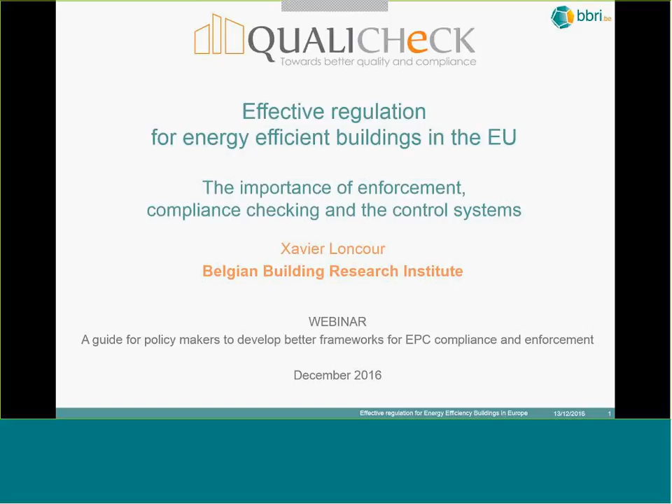Looking at the context of energy efficiency in buildings, we see that we are putting the bar higher and higher, with increasing ambition levels. We want to build nearly zero energy buildings, and we need to know how to build effective regulation to succeed in having more efficient buildings running on energy efficiency, and not fail when we want to reach this objective.

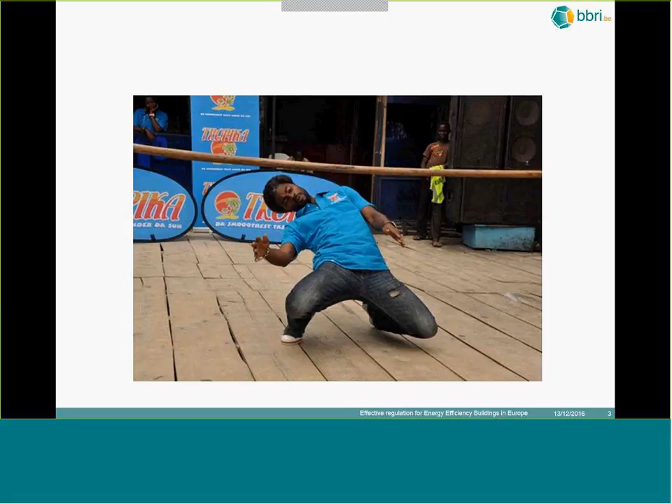So the question is not only to have a regulation, but also to have a regulation that is respected in practice. And on this issue, we have specific experience in Belgium.

Because we introduced the first insulation regulation on buildings in Flanders, a region of Belgium, in 1992-1993. On this slide, what you see is the average insulation level, where a requirement was set, for 200 buildings. Every point is a building, according to the construction date.

In 1992-1993, we introduced a requirement on this, and you see the black bar, which is the requirement. Actually, every point, every building inside the area, is not complying with the requirement.

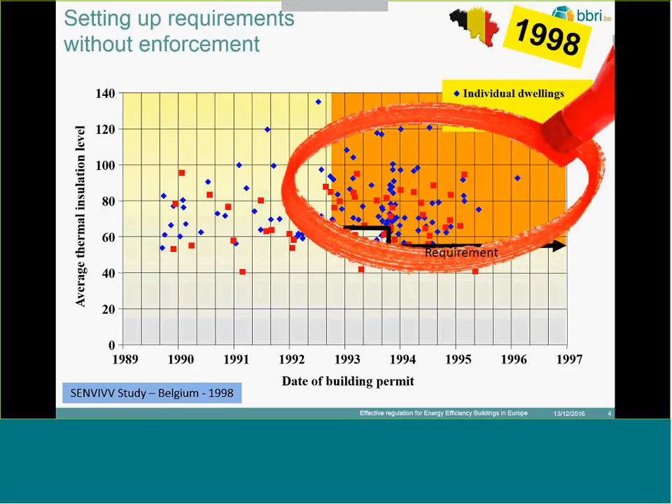It was a learning for us that it's not enough to put in a requirement, but you really need a compliance framework. So this was the first learning of this presentation: without compliance checking, you will have nearly zero impact, and for a lot of people it was really a big disappointment.

Now, the next step in the story is that in 2006, again in Flanders, we introduced the energy performance regulation, this time with compliance checking. And here you see the result of this new regulation.

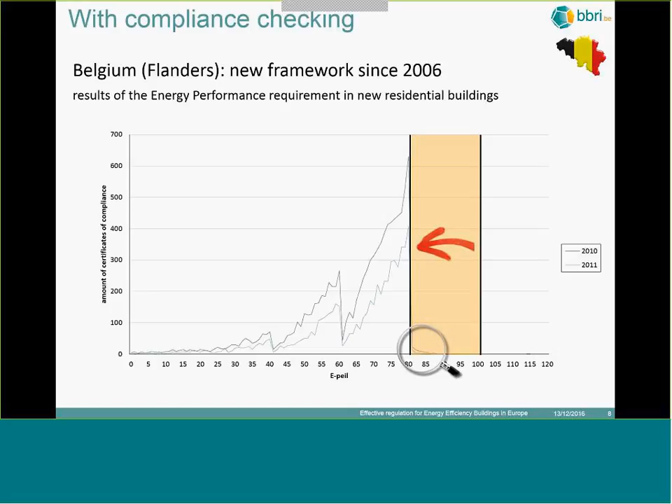What is interesting is that in 2010, there was a strengthening of the requirement from E100 to E80, and what we see from the very first year is that almost every building is complying. So it's really a success story in this context, and we will explain what the success factors were for that.

The first success factor is that with compliance checking, you can expect the full impact of your regulation. It's not sufficient on its own, but it's really necessary.

The question is, what are the success factors to succeed in doing effective regulations? To answer that question, we will use information from the EPBD Concerted Action, which is an action regrouping every member state in Europe, with discussions between member states on how to implement the Energy Performance of Buildings Directive.

So most of the examples I will show today are coming from this book. And I will take 3 examples from 3 EPBD requirements.

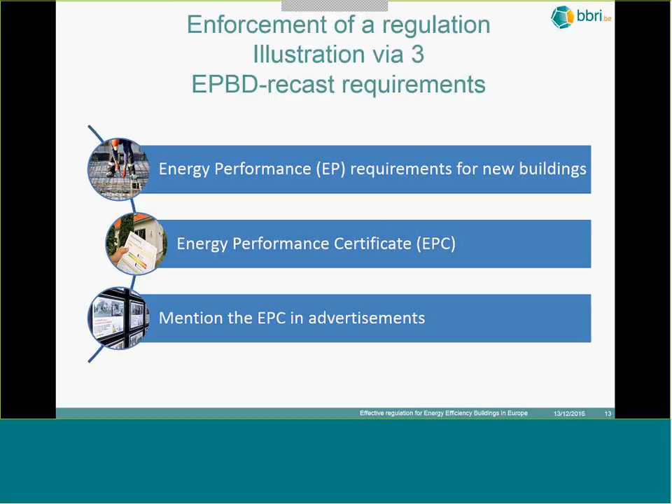The first one is on energy performance requirements for new buildings. You also have requirements regarding the energy performance certificate, the EPC, in the directive, and a requirement regarding the mention of the EPC in advertisements when a building is sold or rented.

The second success factor is that you need to know how to monitor your compliance rate. To illustrate that, I'll take an example of the requirement for new construction.

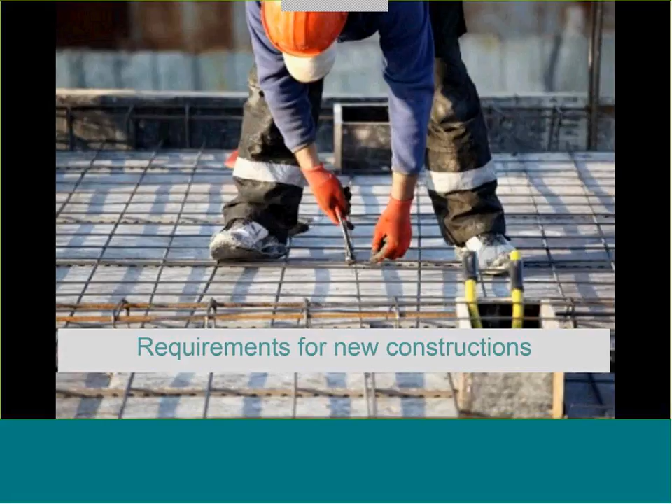In the Concerted Action, we discussed whether member states knew the compliance rate regarding the new building energy performance requirement. In 2014, we found that only 52% of member states actually knew their compliance rate. It means that about half of the member states at that moment didn't know the compliance rate regarding this requirement.

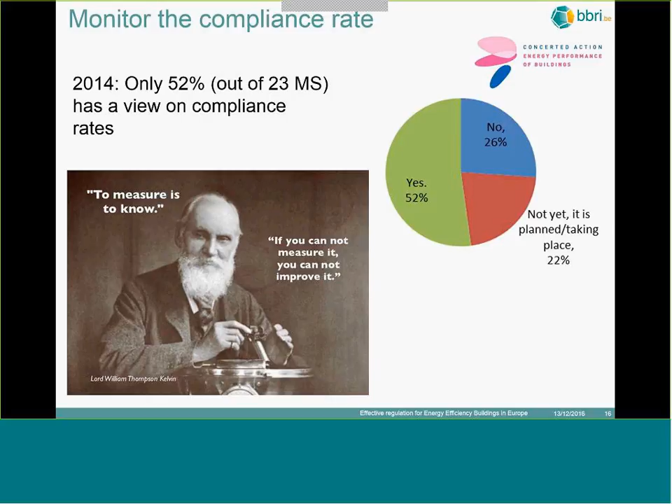As Lord Kelvin said, to measure is to know. If you cannot measure it, you cannot improve it, and that's valid for regulation too. If you don't know the compliance rate, you cannot improve your regulation. So it's really necessary to monitor the compliance rate.

The success key is to define a clear legal framework and actor responsibilities. Looking at the building process, you have several actors involved: the inspector, who makes the control and in many countries is a civil servant; the owner of the building; an architect; and several building contractors. There's also a fifth person involved, the rapporteur, who has to report on the energy performance of the building.

If you look at the different responsibilities and the legal framework, in general what we find in Europe is that it's the owner who is responsible for fulfilling the requirement. In some states, provisions give responsibility to the developer or professional advisor, for instance the architect. The responsibility of the rapporteur is to make a correct certificate of compliance.

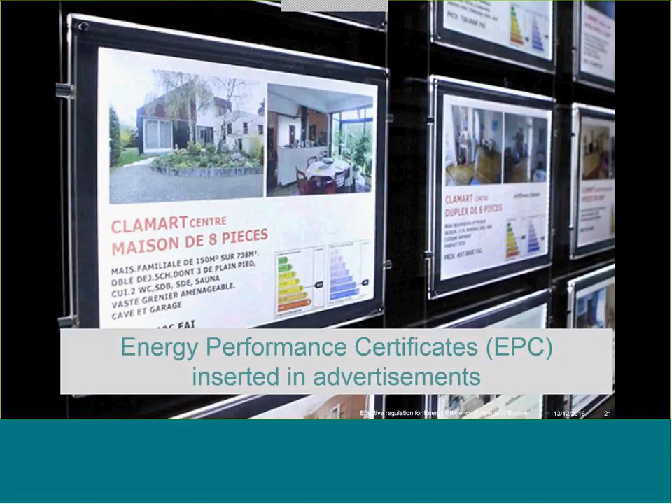Just looking at the responsibilities, if we look at the requirement to have an energy performance certificate inserted in advertisements, we had that discussion in Concerted Action to see who is responsible to comply with this requirement. In Europe, in a set of countries it's the building owner who is responsible; that can be the real estate agent, a representative of the building owner, a web-based company, or a notary. But what's interesting is that in a set of member states, nobody is responsible to comply with this requirement. In this case it's impossible to enforce your regulation and have a high compliance rate. So it's really important to have clear responsibilities.

In Belgium, we changed the way we enforce the regulation. The enforcement strategy in Flanders is based on three pillars: the first is the carrot, then the tam-tam, and then the stick. The stick refers to the sanctioning system, which is the fifth success key to having an effective regulation. You really need effective sanctions adapted to the local context.

Again, looking at the situation in Europe, we see that some member states started enforcement of the requirement for new buildings quite recently—some started enforcing it in 2014. At that moment, some member states had not even started enforcement yet.

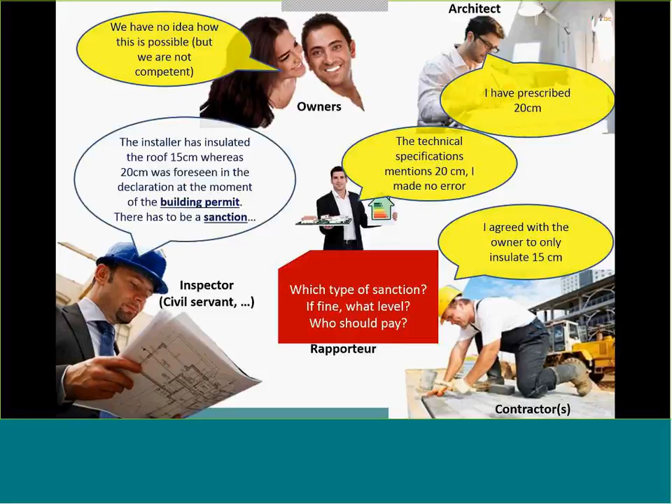So it's a very difficult situation, and the question is which type of sanction can you give. First you go for a fine, but then the question is at what level and who should pay. A specific situation in Belgium, where we changed our mind on this aspect, is who should apply the sanction. In Belgium, it's not evident that an energy problem would receive high priority from a judge. So now the sanction, in this case fines, are directly laid down by the administration, which makes for an effective sanctioning system.

So in Belgium, we have a fine system. How is it working? The amount of the fines are directly defined by the law. For instance, for transmission losses, if you're not fulfilling the requirements, you could have 60 euro per watt per Kelvin. So for instance, if you take a window of 5 square meters, at a difference of 0.5 watt per square meter per Kelvin, the fine would be 150 euro.

One specific element in the Belgian situation is that the fine is directly calculated and presented in the official energy performance software. So if you are not complying with a requirement, you directly know what will be the consequence for you and what the fine will be.

For instance, in Flanders in 2013, fines were given to about 10% of new Flemish buildings, mainly regarding non-compliance with ventilation requirements.

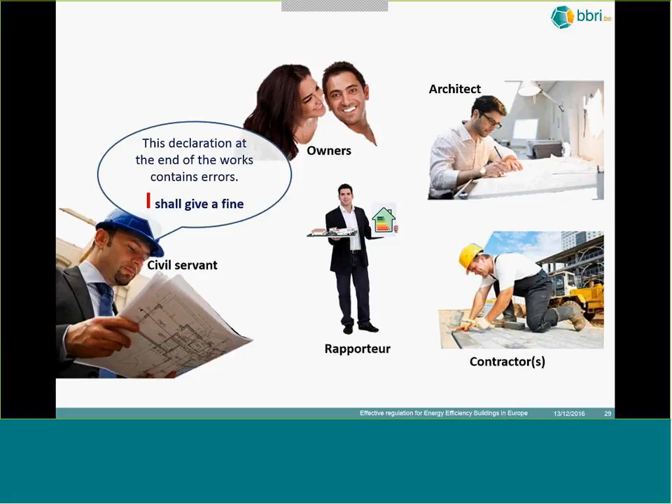Now, let's come back to our example of this roof. For the civil servant, it's clear the declaration contains errors, so he has to give a fine.

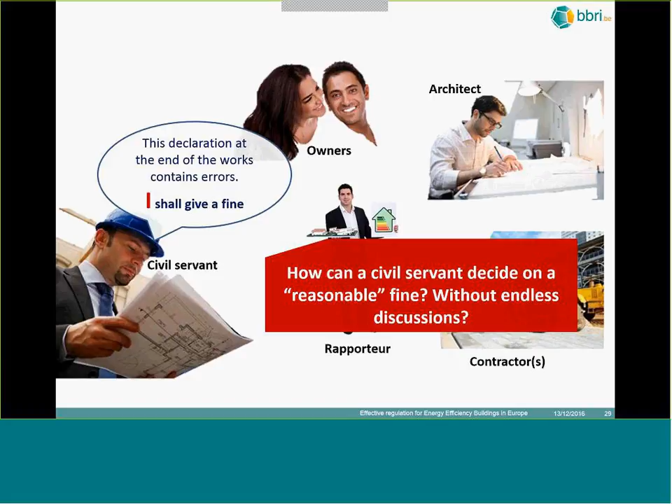Now, how can we decide on a reasonable fine without endless discussion? In the Belgian example, the level of the fine is directly integrated into the law, so the fine is calculated, the amount you see there, and who should pay that. Otherwise, you could start the discussion that nobody made an error, and try to distribute the fine according to responsibility, which can be a very difficult duty.

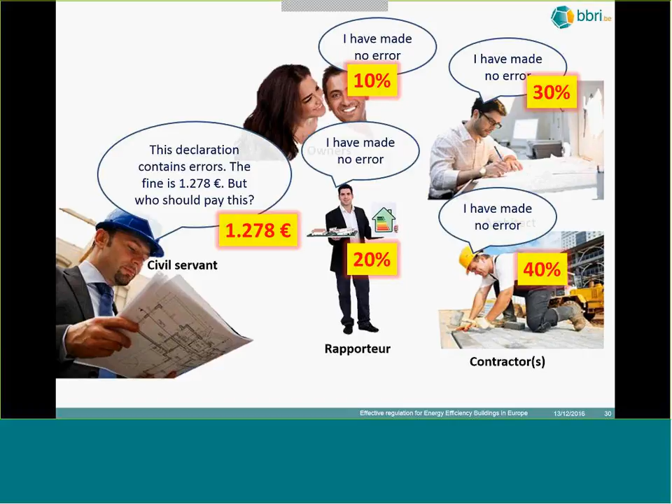So we chose a different solution in Flanders. For instance, we had intensive stakeholder consultation at the beginning of the year 2000, and reached the consensus that the inspector should not have to investigate which party is responsible.

So in this case, if the declaration is wrong, it's the rapporteur who pays the fine. Of course, maybe the mistake is not coming from him, and he should be able to transfer the fine to the person who made the error. If he has a relevant document, invoice, technical prescription, or visit report, he should have a strong case to recover the costs from those who made the fault.

Now, in this case, the amount is clear, and the fine will be paid by the rapporteur if there is an error in the declaration at the end of the work.

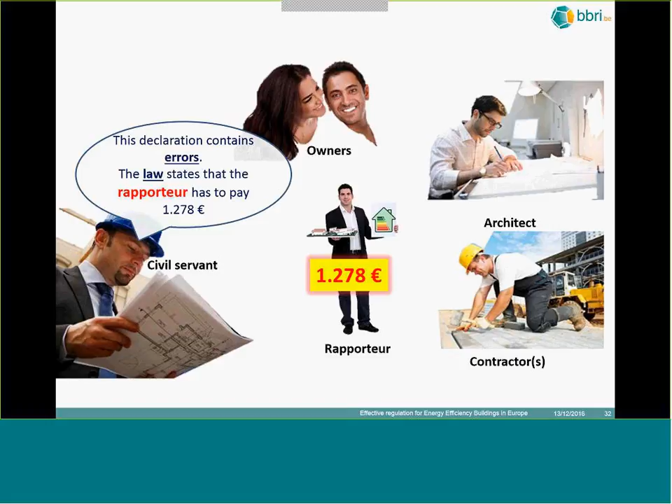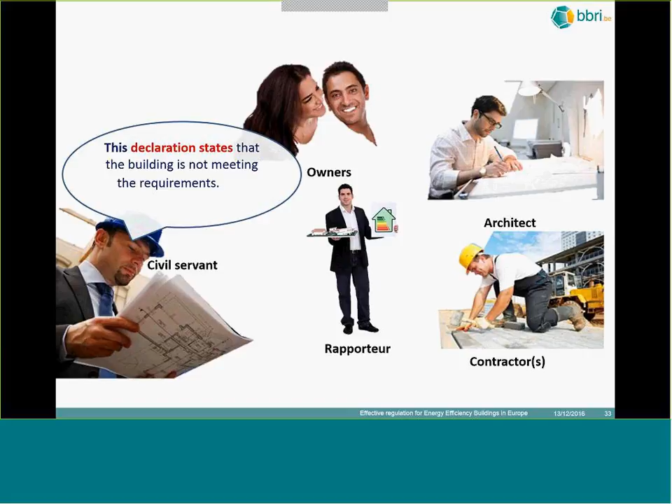Now you can have a different situation. The declaration in this case is correct, but you see that the building is not meeting the requirement, which is different. In this case, the rapporteur is not responsible for that, and it's the owner that has to pay the amount. Of course, for him, it can be a disappointment.

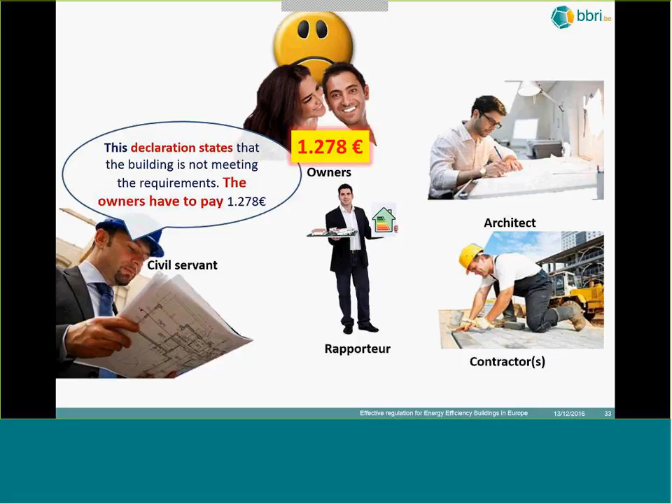So, it's possible to give a sanction to the owner, because private owners are considered non-competent as builders. So how is it possible that they have to pay the fine?

Actually, in the legislation in Belgium, there is a specific provision that says the architect must inform the owner if certain decisions might lead to non-conformity with the legal requirement. So it's not that he was not aware of the situation. He was aware, he decided to continue with the construction process, and at the end he received the sanction.

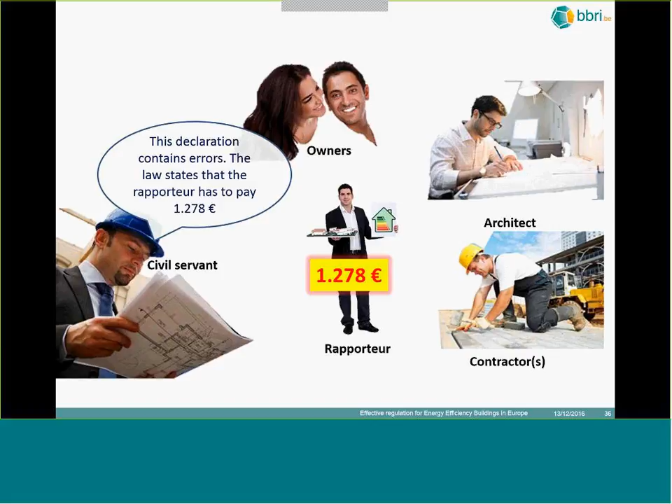Success factor is about compliant and easily accessible input data. Back with our example, there is a sanction given to the rapporteur, and you could start the discussion: okay, there is a fine, but you didn't take the correct input data into account. And the discussion is starting.

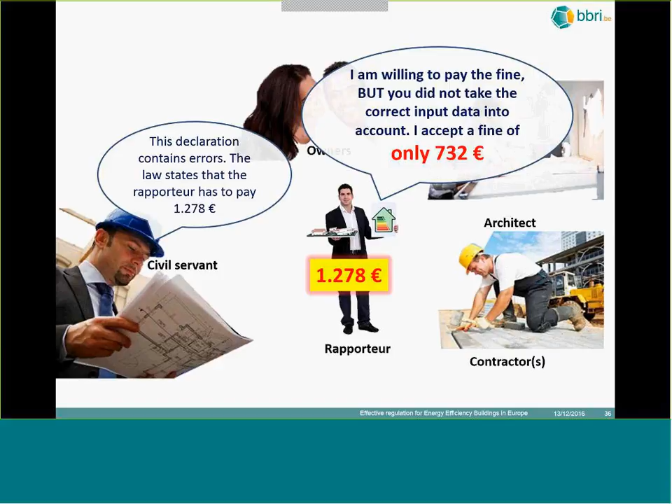This discussion regarding input data has already been discussed in the QUALICHeCK project, also during other webinars, so I will not enter into more detail on that, but if you are interested, there is a lot of information in the QUALICHeCK project regarding this issue.

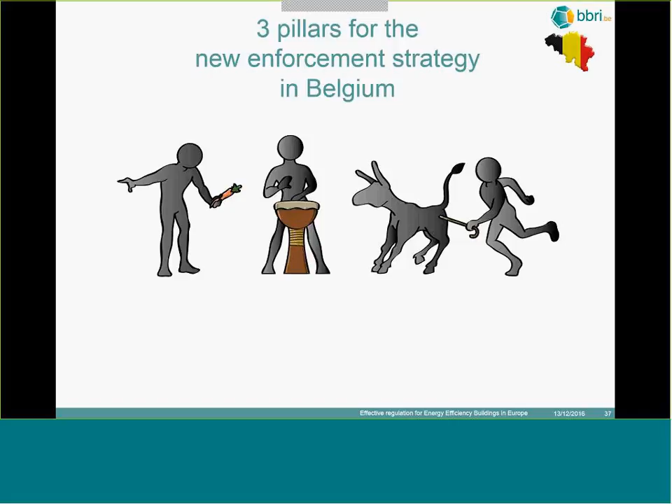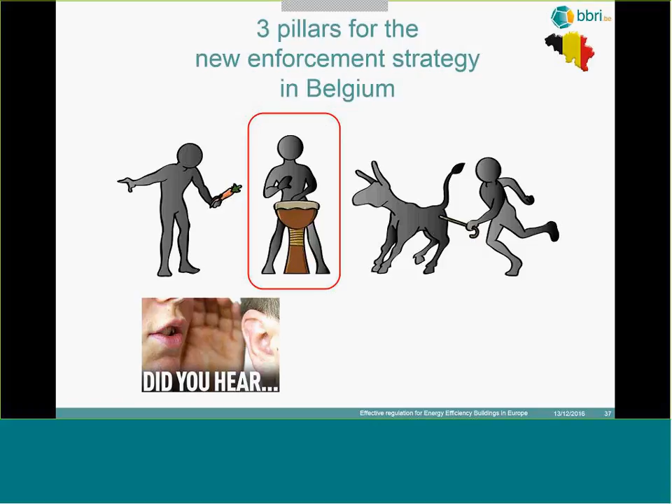If we continue with the 3 pillars for the enforcement strategy in Belgium, we spoke about the stick, then there is the tam-tam. You have to show the different professionals that an enforcement system is in place with sanctioning, and very rapidly everybody will be aware of that. It's very effective within the profession, for instance for real estate agents or building contractors.

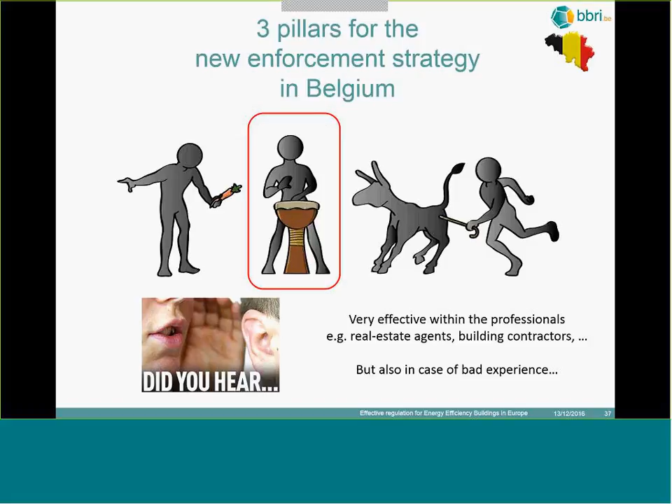But you have to be aware that it works in both directions, and if you don't have any sanctioning system or effective compliance system, they will also know. So you have to pay attention to that. The tam-tam can be efficient and effective, but in both directions. And the third element is about the carrot.

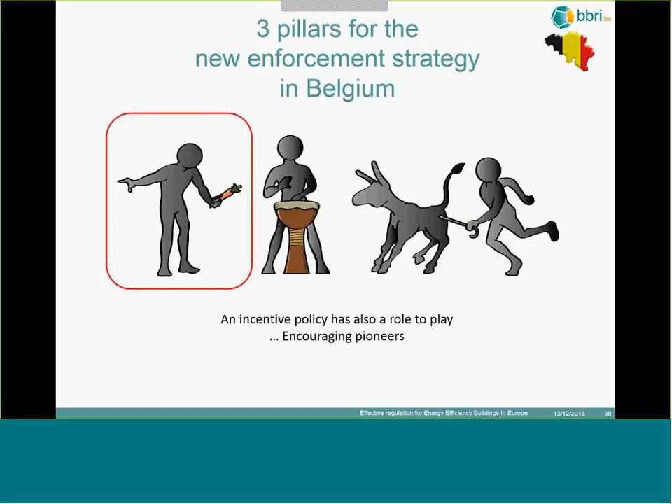An incentive policy also has a role to play by encouraging pioneers, and several member states in Europe have this tradition of incentive policy. It's also, for instance, the case in France.

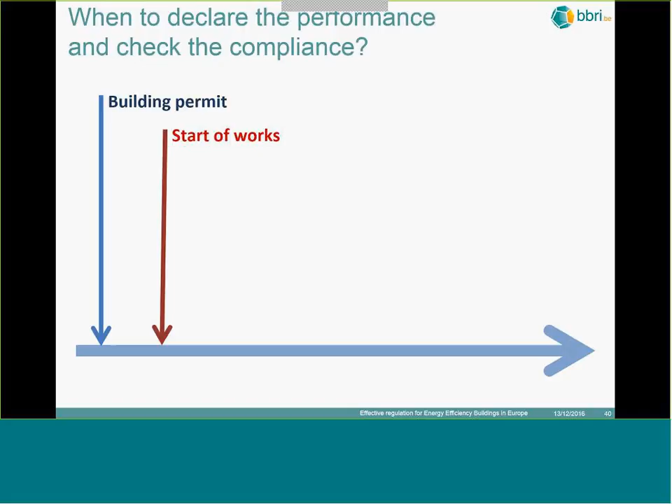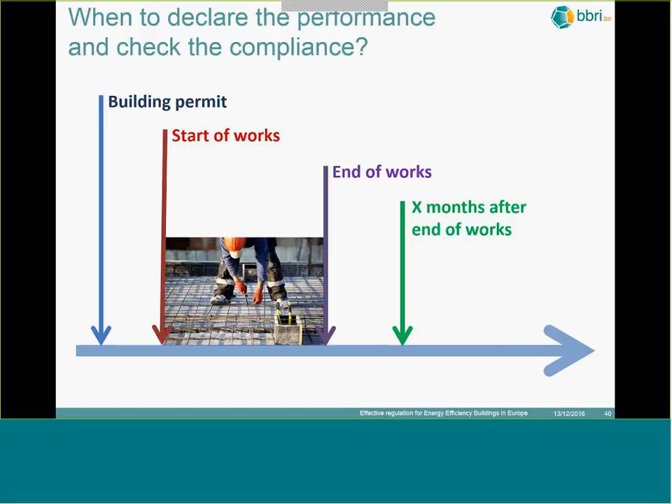The fifth element regarding effective regulation is to choose the appropriate moment to check compliance. If you look at the construction process, you could declare the performance and check compliance at different moments: at the building permit stage, which is still occurring in a lot of member states; at the start of the works; during the construction process itself; at the end of the work; or a few months after the end of the works.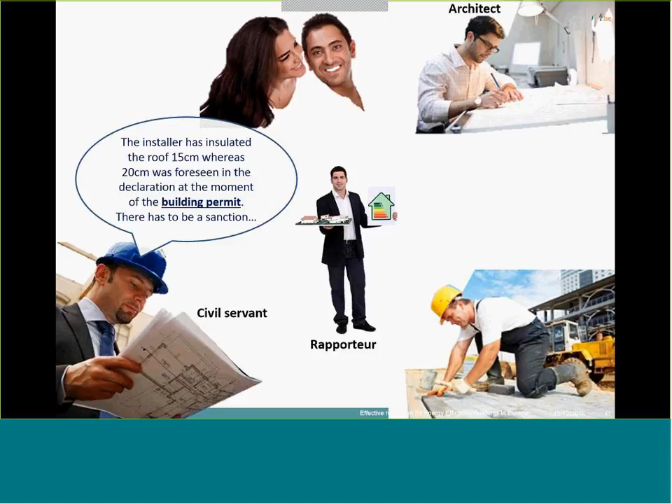We got an example of this with a roof. The installer insulated the roof with 15 centimeters, whereas 20 centimeters was foreseen in the declaration at the moment of the building permit, so there has to be a sanction.

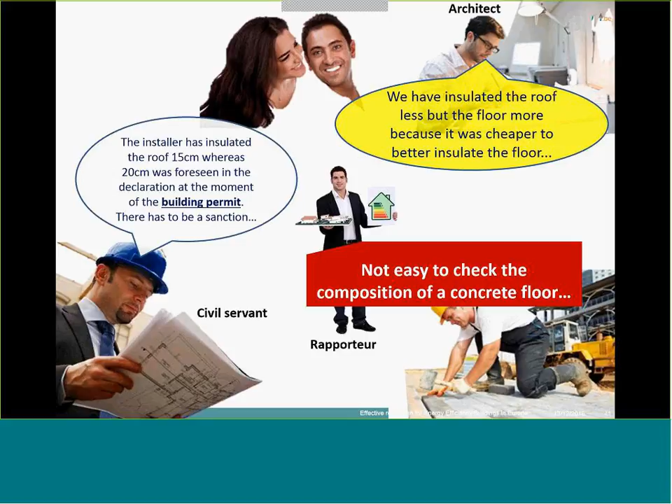A possible discussion: could the architect say we insulated the roof less, but insulated the floor more instead, because it was cheaper to insulate the floor, and at the end we have the same performance? If this kind of discussion starts, it's actually not easy at all to check the composition of a concrete floor when the building is finished.

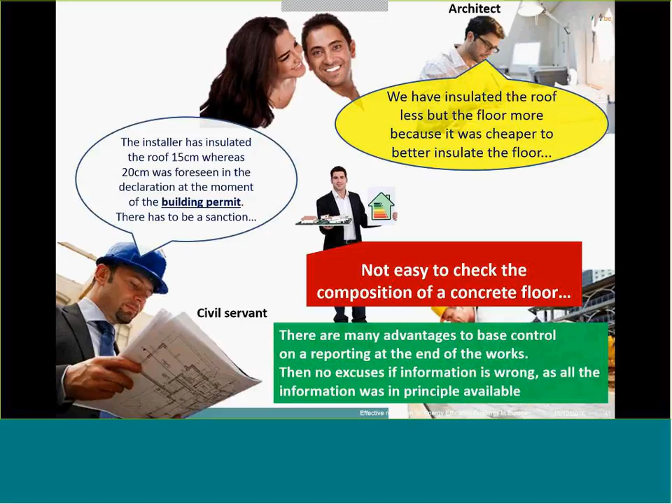We see that there are many advantages to basing the control on reporting at the end of the works, because then you have no excuses if information is wrong, as all information was in principle available.

So in Belgium we have changed our approach, and now we don't check compliance anymore at the building permit stage, but we do it a few months after the end of the works, when you introduce the final declaration. This situation has other advantages too.

When the building is built, you also have the chance to take into account the real performance of the building, for instance regarding the air tightness measured with a blower door test, or the airflow rates of ventilation systems measured on mechanical ventilation systems. So that's another advantage of doing the check at the end of the works.

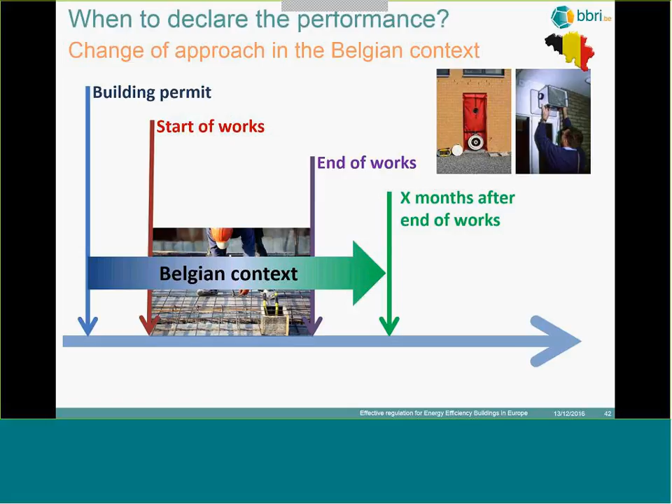If we look at the situation in Europe regarding this compliance check, what we see is that the standard practice is still to check compliance at the building permit stage, or before the works start. You see that almost 80% of member states do the check at the design stage.

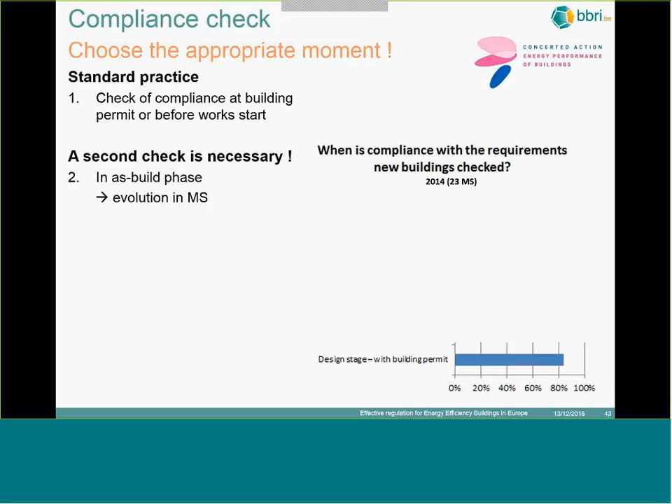But actually a second check is necessary at the as-built phase, and we see an evolution among member states. Before 2010, about 42% of member states made this check at the end of the construction work, and we see that 4 years after, in 2014, the number of member states doing so has strongly increased.

What can this check consist of? Some member states in Europe, like Sweden, check the real consumption of the building, something you can only do once the building is constructed, of course.

You could have a permit to use the building based on the as-built situation, or you could simply check when construction is finalized, what we call the as-built situation. So it's also a trend we see in Europe to do that at the as-built stage.

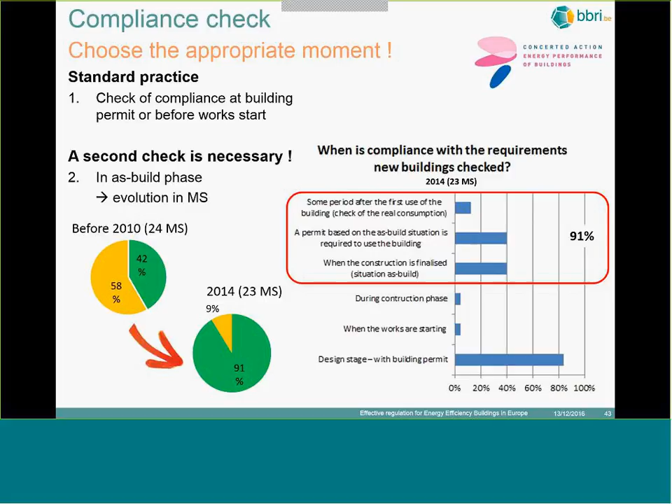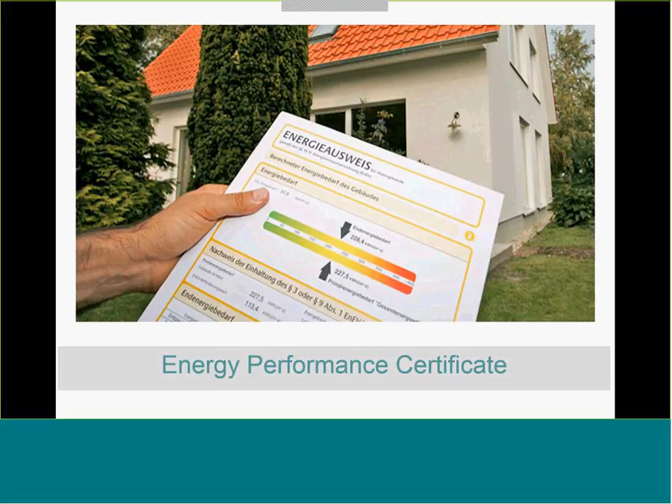The success factor is to design and build an efficient control system. To illustrate this, I take the example of the energy performance certificate, which you need in case of construction and for existing buildings. You will have this EPC in case of a new building, and you will also have an EPC in case of an existing building to sell or to rent.

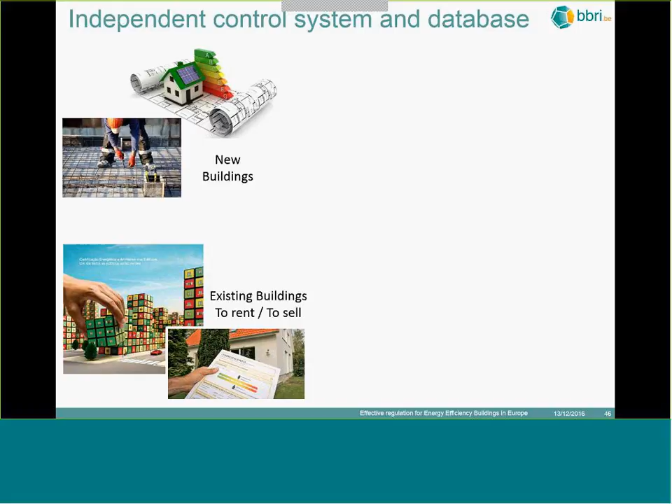The standard practice now in Europe is that these EPCs are centralized in a database. A database is not a requirement from the Energy Performance of Buildings Directive, but we see that a lot of member states now have this database.

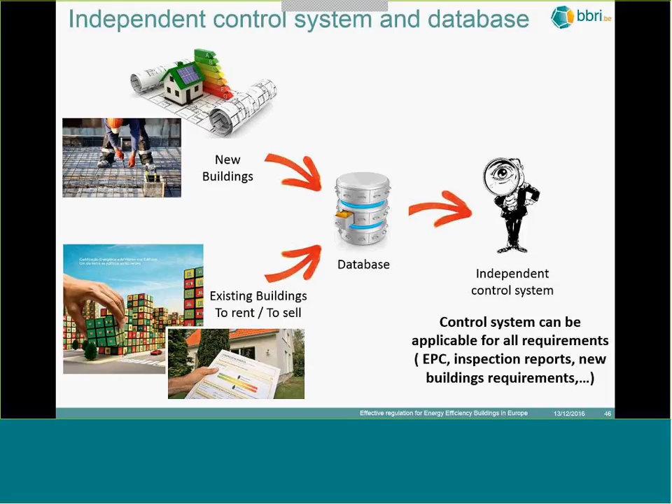This database is, of course, a perfect tool to operate your independent control system. You may have one control system for all requirements of the EPBD, covering the EPC as in this example, but also inspection reports and new building requirements, for instance.

In our EPC database survey in 2012, we saw that 18 member states had a central EPC database. This element is really seen by many member states as a crucial element of their system, because there you have a lot of information where you can do your controls.

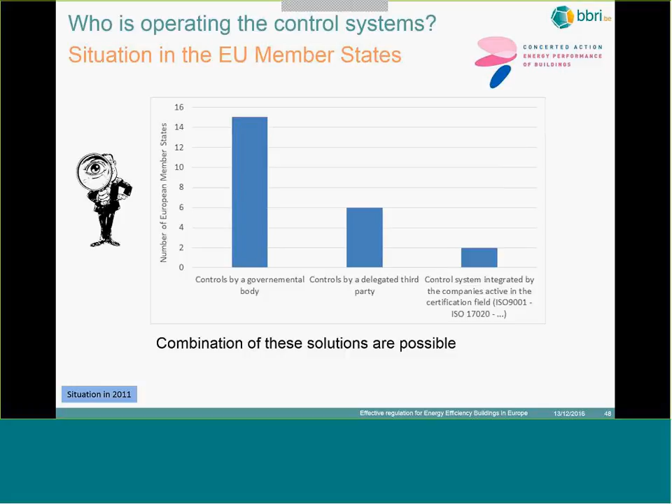The control system: in most member states, it's operated by a governmental body, for instance an energy agency. Control can be delegated to a third party, or the control system can be integrated by companies active in the certification field. Combinations of these solutions are also possible.

So the purpose of the control system, if we take the example of the EPC, is that you want to know if your EPC is a good one or a bad one. You could compare an EPC with a ball, a gray ball, and you want to look at that ball, but you don't know if it's a good one or a bad one. If it's a good EPC, it will be a green ball. If it's a bad EPC, it will be a red ball and will be rejected.

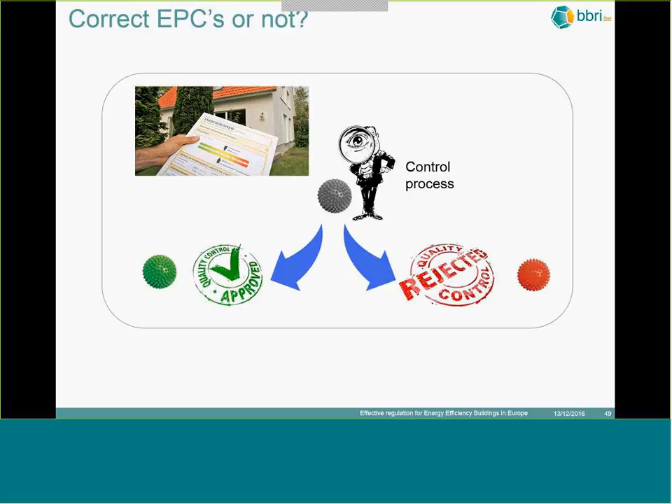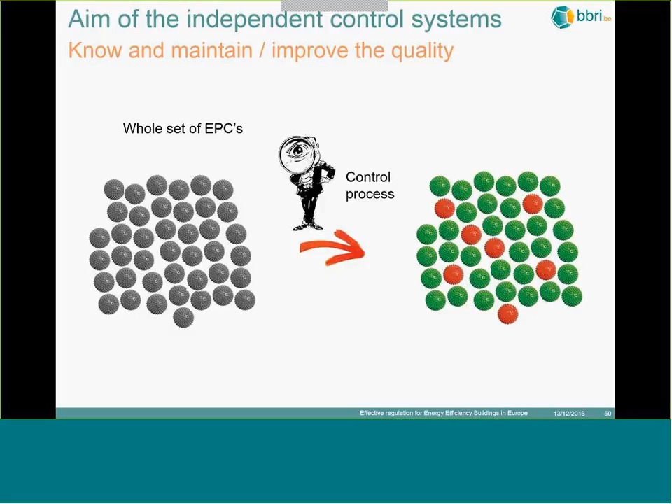So with your control system, when you have all your EPCs as gray balls, the ideal situation would be that your control process gives you the full picture, and you know for every EPC if they are good or wrong. Of course this is the ideal situation, and it's impossible to run exhaustive control with the control system. So you have to make choices on which EPC will be controlled, and there are several ways to do it.

You could select the EPC to control at random. You could do it based on complaints, or you could do targeted control, for instance on suspicious EPCs.

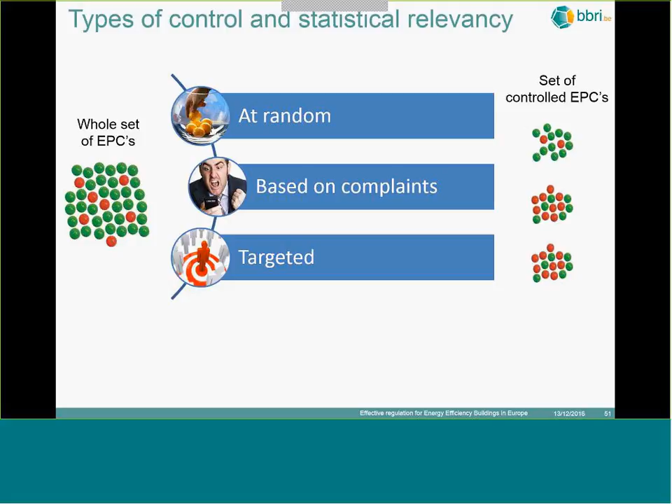When you look at the full population of EPCs, depending on how you select the ones to control, you could have a representative picture of the full population, or you could have a different representation of bad EPCs. For instance, if you base control only on complaints or on targeted controls, it could be that you get another representation of bad EPCs.

In Europe, most countries carry out targeted control. Actually, the EPBD also requires random checks, and that's the only way to have a real view on your compliance rate if you really want to know it. So it's important for member states to be aware of that and also to run random control.

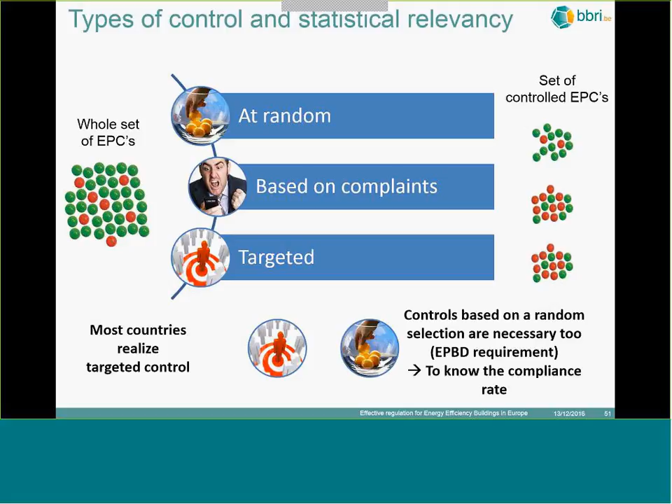Now regarding the last success factor, as Suzanne said in the introduction, it needs courage and also resources. We had a survey in 2012 with member states, asking them what, according to them, are the most important barriers to implementing an effective compliance framework. We saw that the first one was the lack of political support, and then also the lack of resources to implement the system, and then to keep the system running. So it's also an issue to have enough resources to operate the system.

So now we have the different success keys. To make an overview: you need an effective system of compliance checking. You need to monitor the compliance rate and to know it. You need a clear legal framework and clear actor responsibilities. The sanctions have to be effective and adapted to the local context. You have to choose the appropriate moment to declare the performance and to check compliance. You design and build an independent control system, and this needs courage and resources.

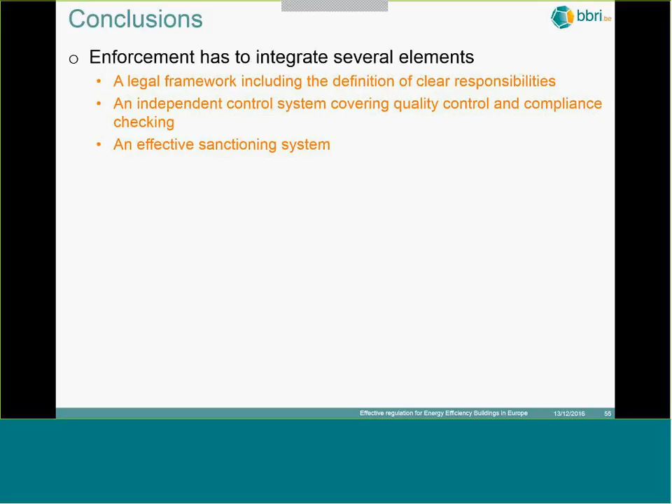As a conclusion to this presentation, we can say that enforcement has to integrate several elements: a framework including clear responsibilities, an independent control system covering quality control and compliance checking, and an effective sanctioning system.

We see that some European member states have a long tradition with this issue, while for others it's relatively new. Compared to a few years ago, progress has been made in Europe and is still ongoing and even necessary. Implementing and improving national regulation is a continuous process, and we can say from our experience in Belgium that non-compliance is really not a fate.